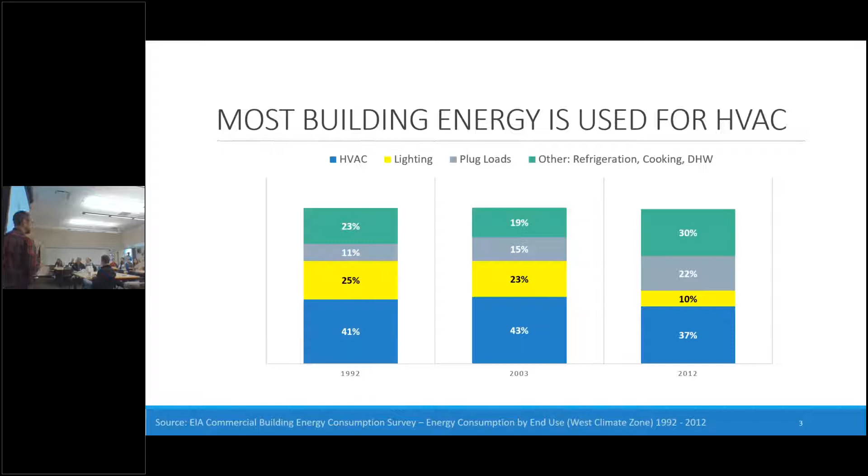And achieving comfort takes a lot of energy. Over the last 30 years, this is a breakdown of how buildings have used energy. The most recent data from 2018 should be coming out in the next year or two, so this is the most recent that we have available. You can see the bottom blue chunk is HVAC, and lighting has gone down a whole lot over the last 28 years or so. And it's not because we're living in caves, right? It's just that we're still getting the same number of lumens, same amount of illuminance, using better technology, using fewer watts to do so. And I think we need to do the same thing with thermal comfort.

If it gets below 70 degrees, you might say, oh, I like it on the chilly side. Sure, but your body actually goes through physiological changes in response to a colder environment. You get goosebumps, circulation changes. It starts moving more blood to your core, which means less blood going to your head. So maybe you start thinking a little bit more slowly, but especially your blood comes away from your fingertips, which, if a lot of us are typing, your typing speed will go down and you get more errors. You might also run to the coffee room and warm up your hands around a warm mug more often.

Same thing above 80 degrees, and this is just looking at air temperature. Your body goes into like venting mode, right? You start sweating. Your body tries to change its metabolic rate a little bit to adjust to your surroundings. So it might not be something that you actively notice, but there are actual changes that occur once you get outside of this comfort range.

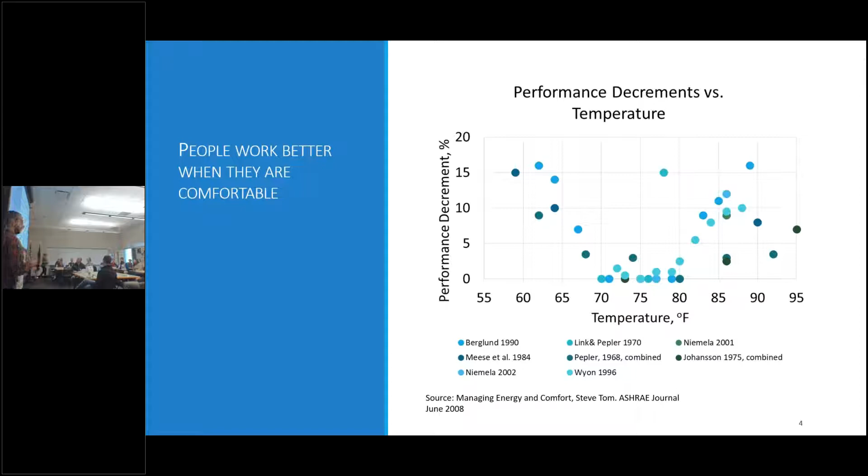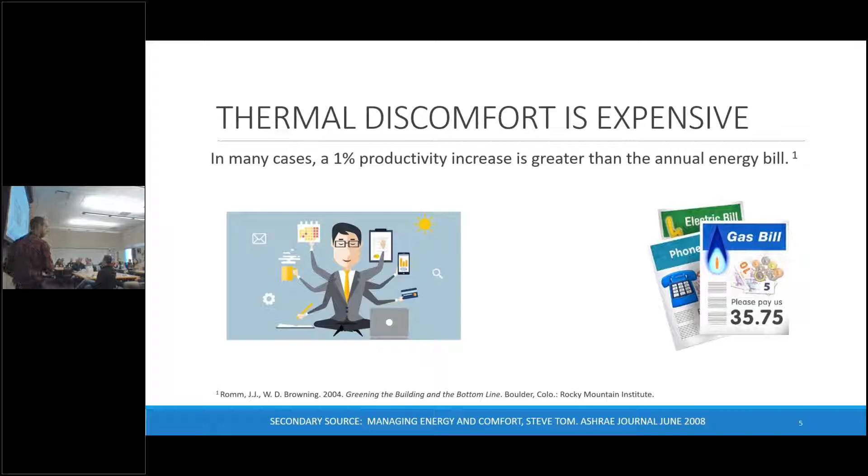But just to really hammer this point home, we're designing buildings for people, and I'm all about energy efficiency, right? That's kind of my world and how we look at payback periods in terms of energy efficiency options. But the utility bills in a building are often minuscule in comparison to the dollars spent for people's salaries. And this might be pretty obvious, but over the life cycle of a building, the vast majority of dollars spent per square foot are going towards people's work.

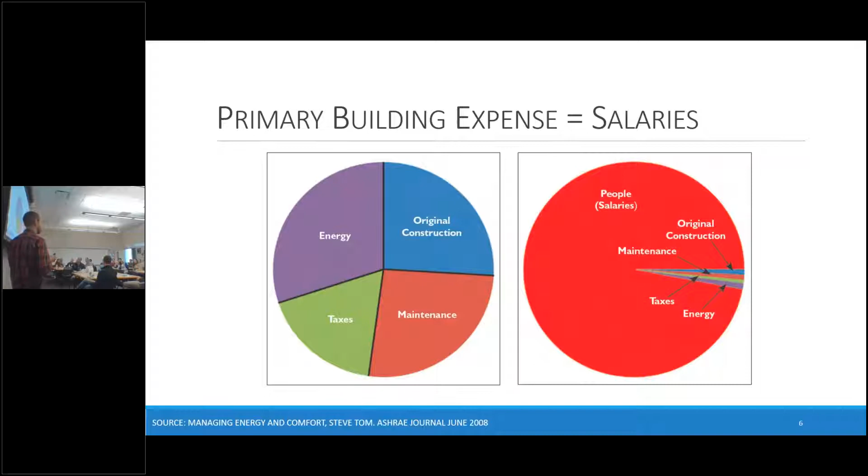In terms of real dollars, say you're building a new 20,000 square foot building in Boise that is going to house 100 employees. Assuming construction at $200 per square foot, that's going to be a $4 million building. I realize these are kind of Mickey Mouse ballpark numbers, but just giving you a sense that if everybody in there had an average salary of $50K a year, the dollars spent per square foot in that building.

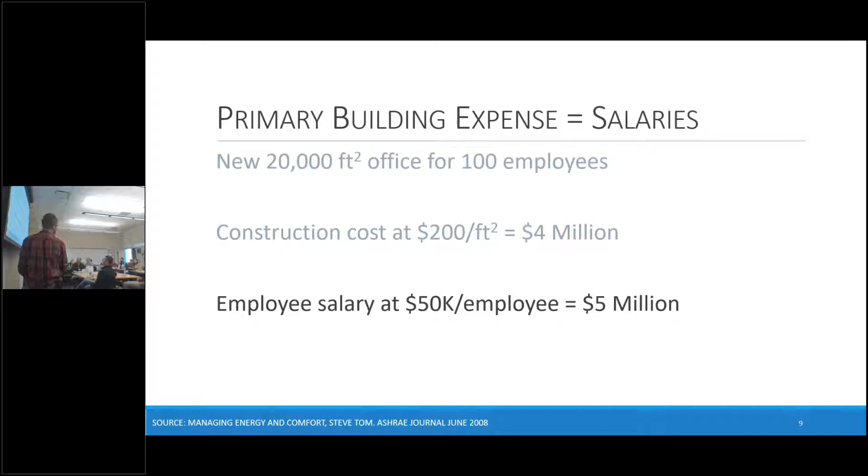The $5 million salary over the course of the year is going to outweigh the construction cost, and that's just in the first year. So if you are freezing or sweating in your office all the time, you're outside of that ASHRAE defined thermal comfort zone, that's going to cost each person $330 per year in terms of lost productivity. And there have been a number of studies out there about that.

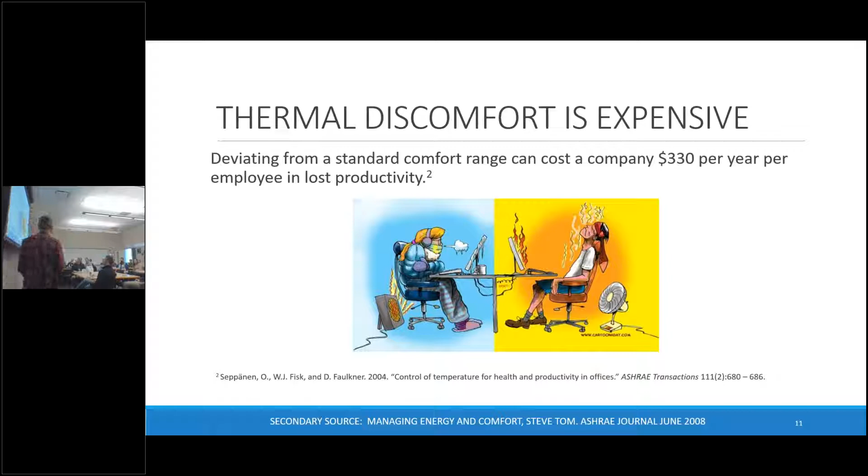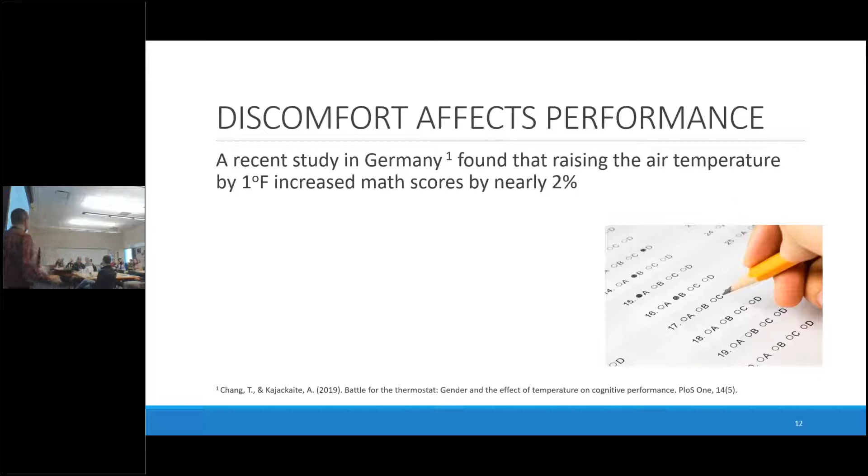A groundbreaking one that came out this year from Germany was actually on students taking math tests. They found that raising the air temperature a little bit, because they had been overcooling some of the classrooms, netted a 2% increase in math scores. This was particularly skewed towards the female students, which had different clothing levels and metabolic rates than the male students. This got picked up by the media, everybody, everyone from Fox to New York Times, saying engineers were freezing women out of offices, we're doing terrible things.

Once again, I think that's a misreading of the actual data and how buildings should be operated, right? There's a whole lot more that goes into it than just air temperature and design days.

So what actually is a holistic measurement for comfort? Because if you look in ASHRAE, they're not going to say put your thermostat at 72 degrees. They're going to say look to the thermal comfort standard.

There's a couple ways we can measure that. There's the predicted mean vote. If you were to just estimate how people are going to be behaving in a certain space, are they going to be generally on the cold side, -3, or way too hot, +3? You want to keep it somewhere in between, from slightly cool at -0.5 to slightly warm at 0.5. In between, it should be kind of out of sight, out of mind. They're doing fine. That is directly related to the predicted percentage dissatisfied.

Now, these are predictions, not actual responses. So what they did was they locked a whole bunch of people in a room and hooked them up to electrodes so they could actually sense when people started getting goosebumps, when they started sweating. It was the 70s, so it was fine. They could do that.

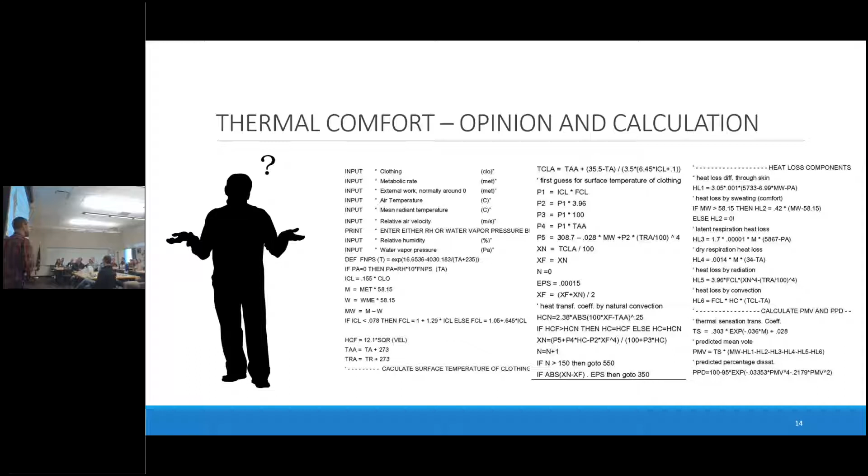And that's how we kind of came up with these equations to estimate that generally, if you're sitting outside in shorts and a t-shirt and it's 0 degrees, you're probably not going to be too happy, right? Your body's going to go through different changes, and you're probably not going to be super thermally satisfied or comfortable. All right, so those are our metrics, and there are 6 factors at play in terms of that.

So first, if you're just sitting, enjoying a box of chocolates, or soon to be lunch, that is 1 MET. That's what ASHRAE defines as their metabolic units. And then if you're, say, going for a run across the country, that's anywhere from 4 to 8 METs. The ASHRAE standard is mostly focused on people sitting in offices. So if you're doing anything more than kind of walking around, it's not necessarily going to cover that.

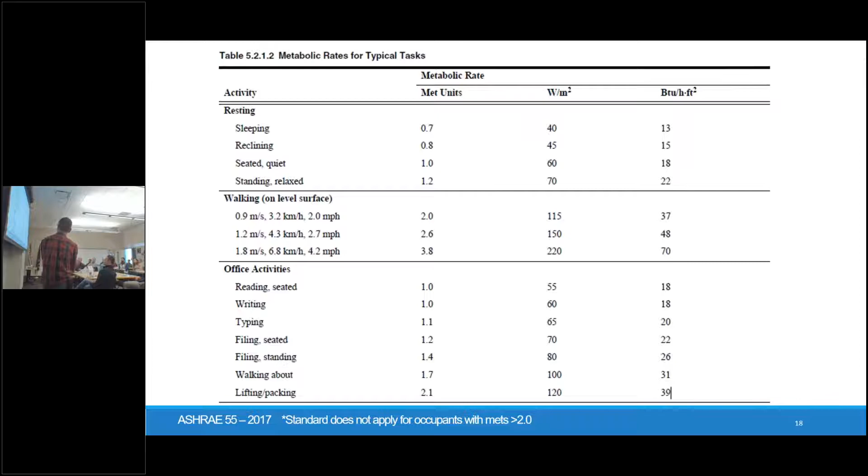So there's a table in there, and you can see an associated MET. Reading, typing, and even walking around, that's between 1 to 1.7. So that's one thing that affects comfort. The other thing is clothing level.

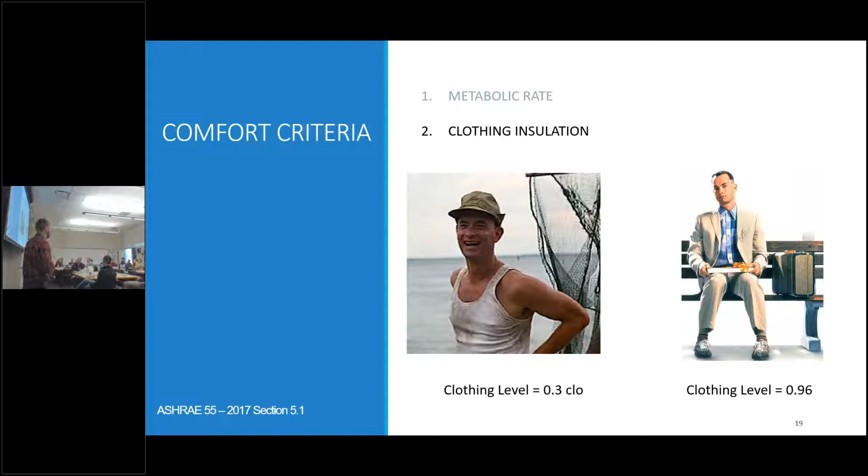So if you're out on a shrimp boat and you're wearing just shorts and a t-shirt, your clothing level is at 0.3. If you are wearing full trousers and a jacket, that is a clothing level of 0.96 or close to 1. And you can build your own clothing outfits if you want.

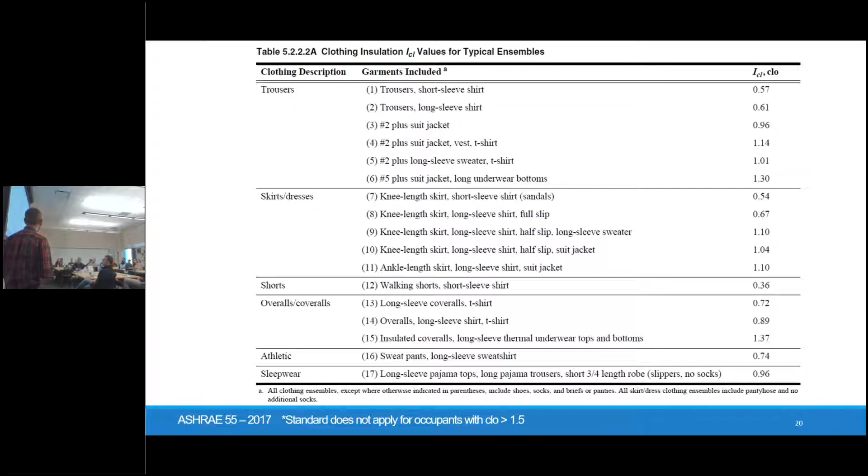And there's also a table of just kind of standard wear that you might expect people to have. Once again, if you are super bundled up, if you're coming into the office wearing a parka, they didn't do a whole lot of tests on that. So that's kind of outside the boundaries of this particular thing. So you can only tell somebody to put on so many sweaters. And after a certain point, after 2 or 3, it just doesn't apply anymore.

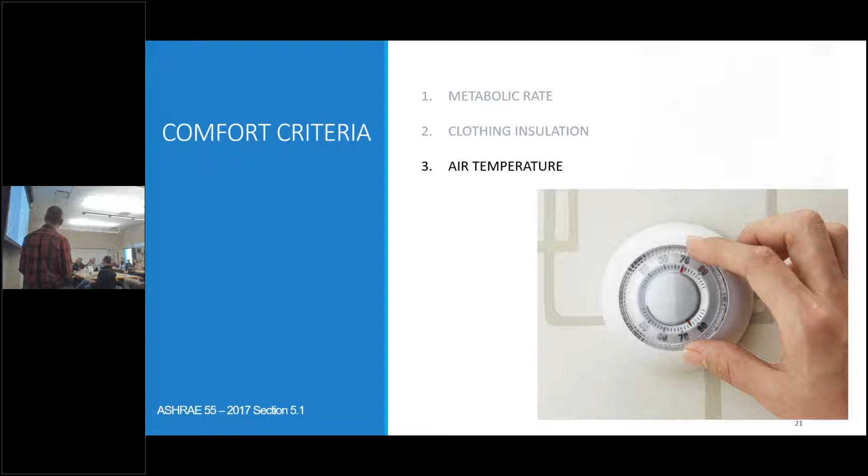All right, the third criteria is air temperature, and this is what we're kind of more familiar with. One thing that gets missed and has been a focus of mine is radiant temperature, or the average of the surrounding surface temperatures.

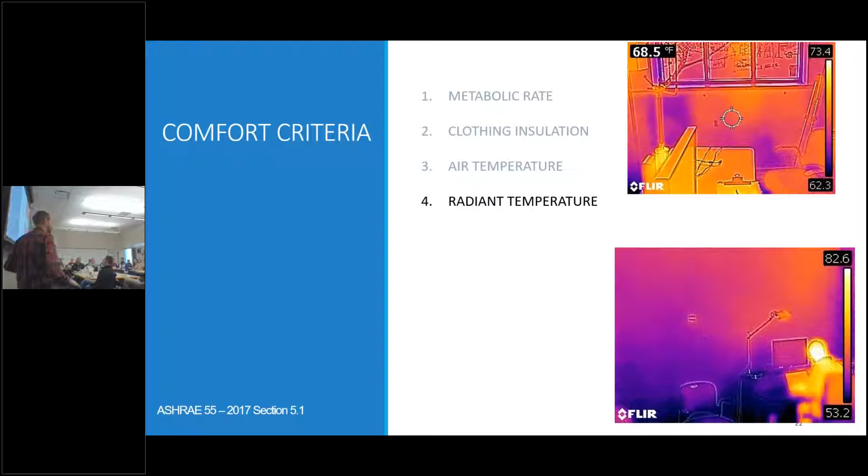So if you parked in the sun outside and you get back in this afternoon, sure, the air temperature might be a little bit chilly, but the surfaces within that car are going to be warm, and you're probably going to feel pretty comfortable on the drive back to the office. But there's a lot that actually goes into calculating what that average surface temperature is.

You could hang a black ball in the middle that's got a vacuum and a thermocouple in it, and it will sense all the radiation coming from all sides, and you could get the mean radiant temperature that way. But we don't like to have giant floating orbs in the middle of our office spaces, so you have to estimate it.

And P.O. Fanger was kind of the first to pioneer this in his dissertation in the 70s. So you're approximating a human either sitting or standing, and their distance and relation to different walls, and then adding up each of the surface temperatures on each wall. If there's a window, that's going to have a big impact, so you have to divide all of that. It's very complex, but a very robust way of actually averaging all the surface temperatures.

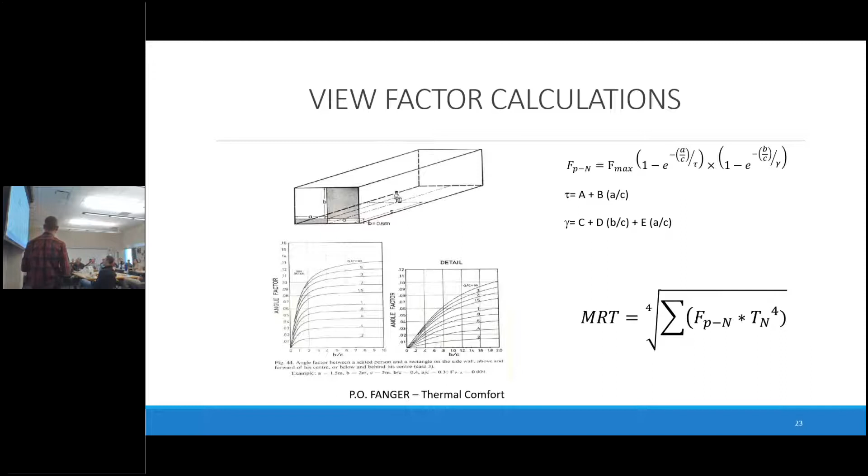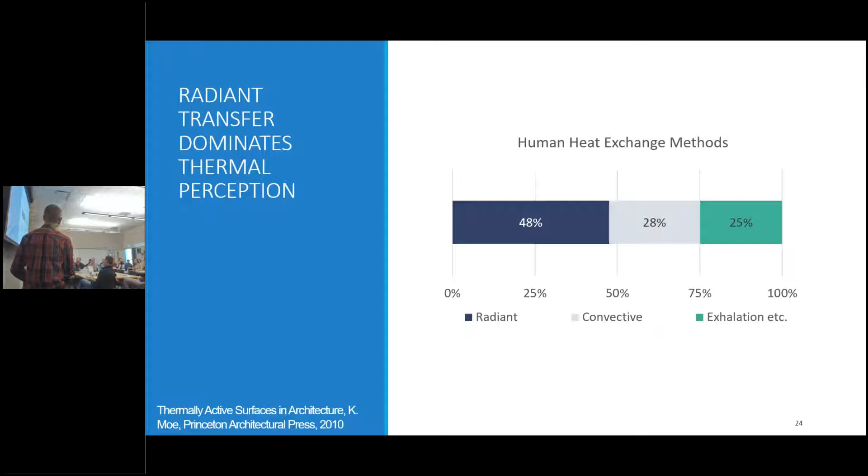And as I mentioned, this is kind of one of the dominant ways that our bodies are wired to perceive comfort within a space. The surrounding surface temperatures, our radiant perception, is the biggest piece of it, versus convective or our kind of metabolic rates.

Airspeed also plays a key role. If you are standing right above a floor vent, that's going to feel very different than if you're in kind of a dead zone. ASHRAE 55 assumes an airspeed rate of 40 feet per minute or less. If you get beyond that, then you have to kind of do some adjustments to your operative temperature.

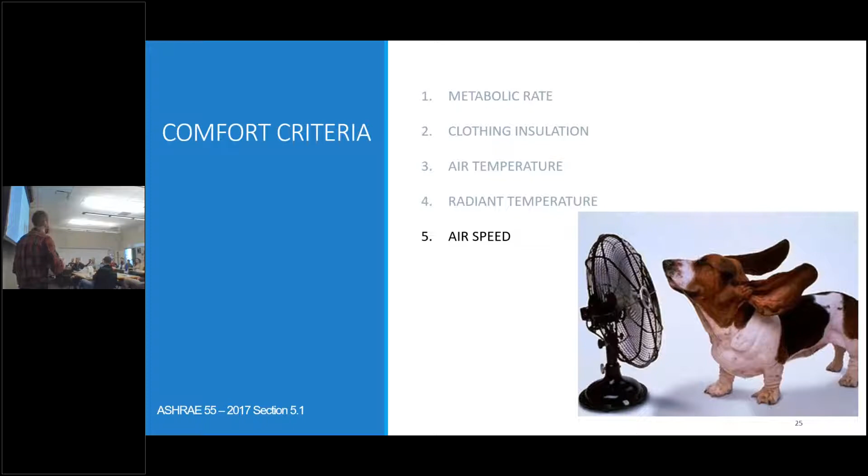And last but not least, humidity. We also sense the latent energy in the air. So those are the 6 factors. How do we apply them?

There is step 1, we can use the graphic zone method. This is basically an advanced psychrometric chart that you're probably familiar with, but it's only suitable for a very narrow set of conditions. It's looking at people that are basically sitting at their desks, maybe typing.

Clothing level of between 0.5 to 1.0, and it takes a lot of clothes to actually reach 1.0, and that's where a lot of the gender discrimination came from, or complaints of that, because a clothing level of 1.0 assumes you're basically wearing like a 3-piece suit.

It also does not account for direct sunlight, and it's limited in terms of its humidity ratios. But it's better than nothing. It's better than just assuming a certain set point of the thermostat.

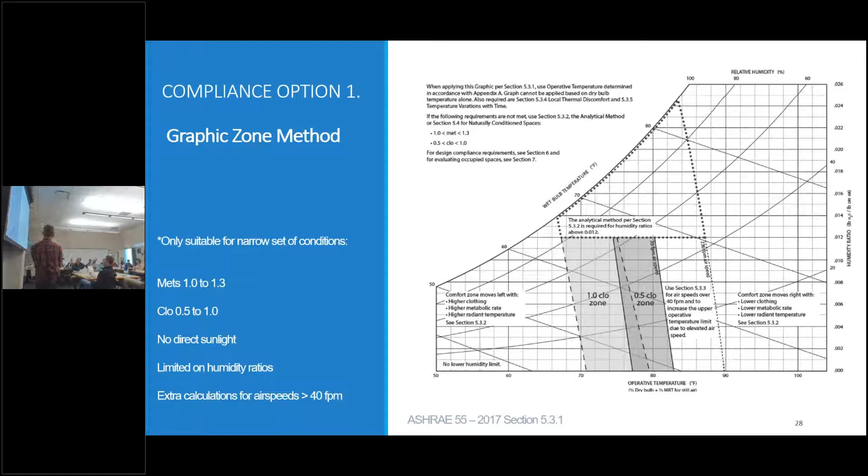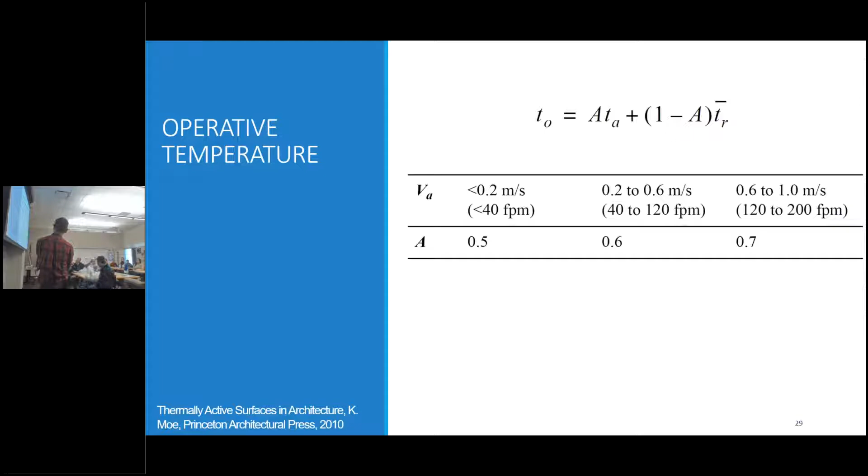All right, and in terms of the temperature that you're reading on this, you're looking at the operative temperature, which is an average of the surrounding surface temperatures and the air temperature. That changes a little bit. It can be weighted a little bit more heavily towards the air temperature depending on the velocity, but for most situations, you can use kind of a rule of thumb and just average the two.

The second compliance option for meeting ASHRAE 55 is to use the analytical method. They have all the code for this in the book. You can program it in BASIC or Excel if you want. So I've got my own Excel sheet that does all this for me.

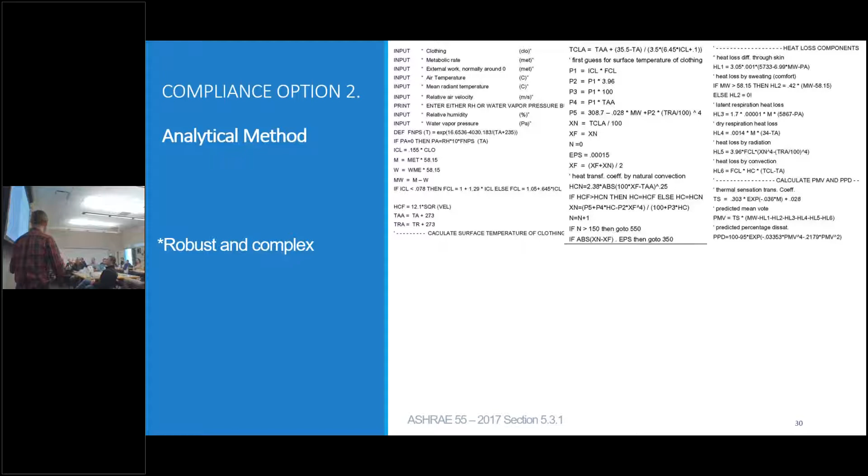It is very robust. It takes into account all of the 6 criteria. And what it essentially does is it calculates the temperature that is on the surface of your clothes. So it will look at the convective coefficient coming off of each individual person.

So that's kind of the criteria that we designed for. And we want to make sure that when we're sizing systems, instead of just sizing for, say, 70 degrees Fahrenheit, we try to maintain a predicted mean vote between -0.5 and +0.5. There's a lot of complex steps going through that, right?

So energy models are one way which has that code built into it. I'm a fan of Energy Plus and Open Studio since they're free, Department of Energy resources available to you.

ASHRAE, though, has also sponsored a couple of online tools that you can use through the Lawrence Berkeley National Lab. So here's one to actually calculate mean radiant temperature. It's available off of GitHub, but if you just Google MRT calculator Berkeley, you can design any room, where your windows are, what your orientation is, and hover your cursor over any square within it, and it will actually calculate what that mean radiant temperature is for that one point.

So this is looking specifically at your design day, like your July 21st in Boise, hottest summer day. Am I still going to meet this criteria or not? And I think it's important to use this tool for sizing as opposed to just looking at an air temperature, because you might end up sizing your system smaller. You might be oversizing if you're just looking at the air side system only.

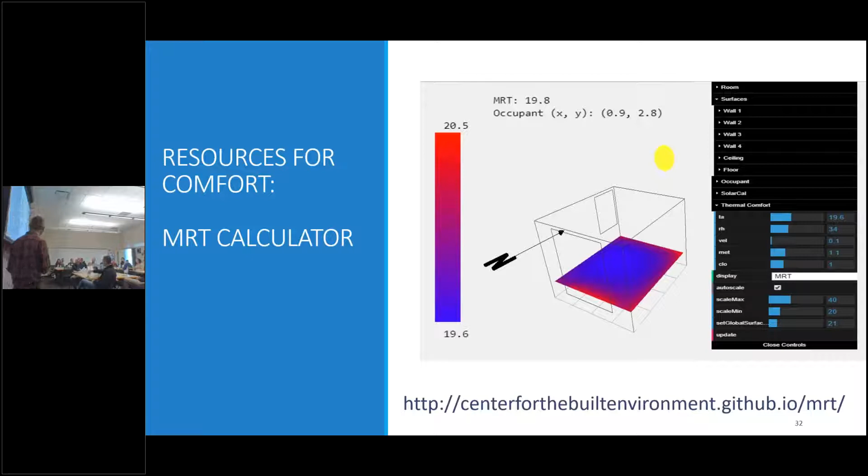The other tool that I use a lot is the comfort tool. That's also just available at CBE Berkeley. And this has your 6 inputs.

So if you are given a certain situation or somebody says, I'm unhappy in this environment, you can actually take measurements, put them all in here. And then what you see in this purple band is a range, because we all have different sizes, shapes, preferences. But generally, this is where most people are going to feel comfortable.

The lower limit here is a PMV of -0.5. Upper limit here is a predicted mean vote of 0.5. And then this red dot is where you actually are. So if you're within this band, you can use this tool to say, I've met compliance with ASHRAE 55. If you're outside of that bound, then you can't necessarily claim that.

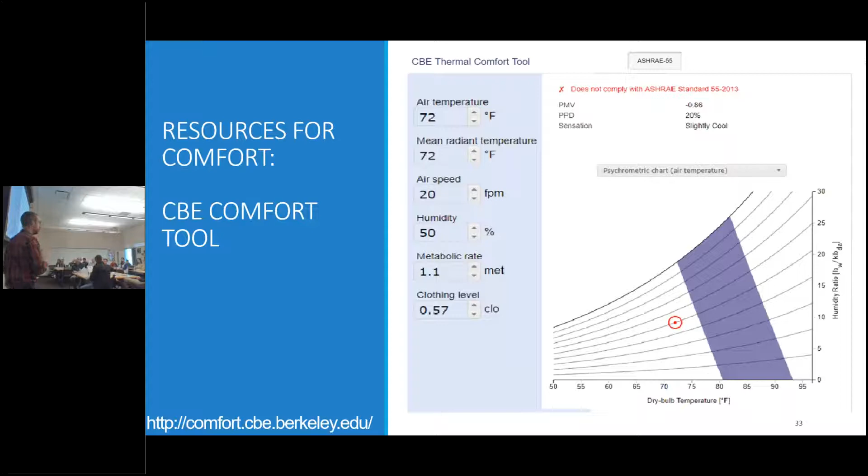So we can actually go through and take measurements and incorporate all 6 criteria instead of just looking at a thermostat. So I use a little thermal camera. They've come down a lot in terms of size and price. You can also check these out from our tool loan library, which is free.

That's another Idaho Power resource. So we've got more tools upstairs. This can plug into your phone as well. And I think it's like $250 now. We even have a smaller one that's about the size of a pencil eraser that we're doing for some research right now, and that one's really fun to work with too.

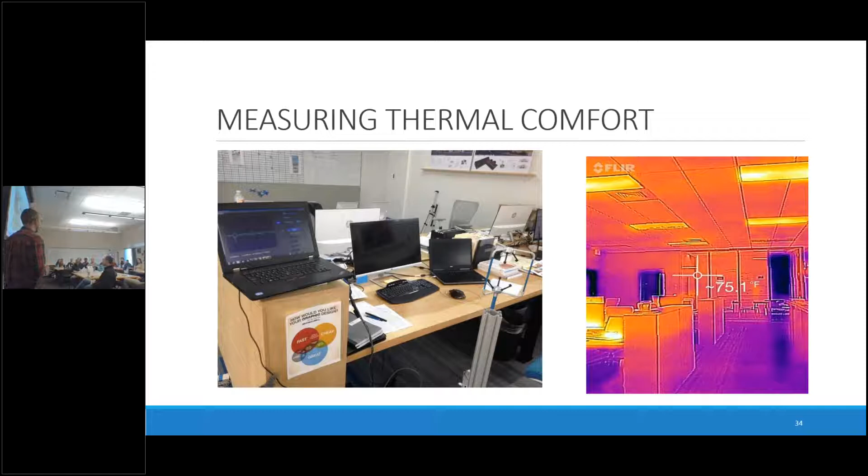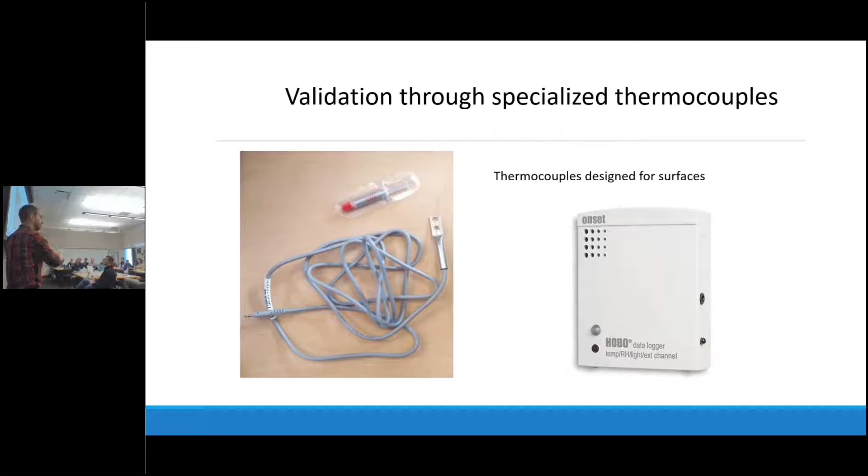So that one, you get a sense of surface temperatures. Of course, you can measure air temperature and humidity. You can log those temperatures as well using thermocouples. You apply some thermal paste to one side, put some insulation tape over it, so that way you're not picking up the convective air temperature, you're actually getting the surface temperature of the wall. And you want to make sure that you cover each surface - each wall, the floor, the ceiling, a window, if there is one in there.

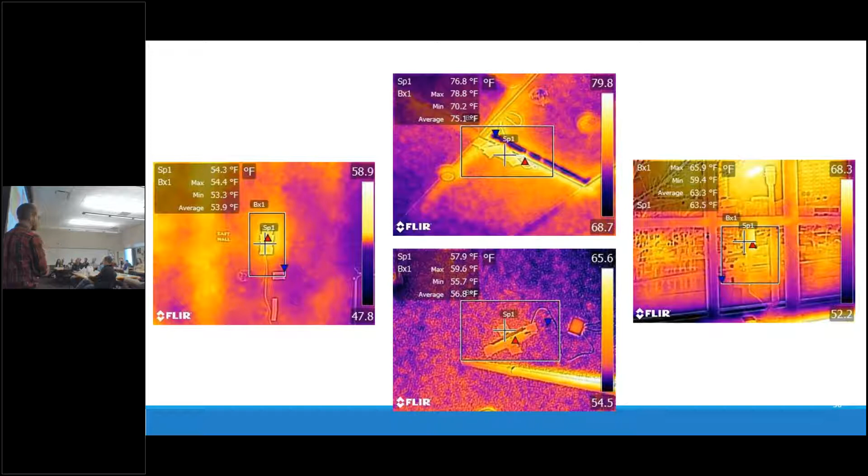And then you can plug that into your calculation method or your Berkeley MRT calculator and figure out what the mean radiant temperature is over time. So we actually went around and did that. We also measured airspeed - I've got a sonic anemometer here, which picks up air velocity within this space, can sense very slow air currents, which is great.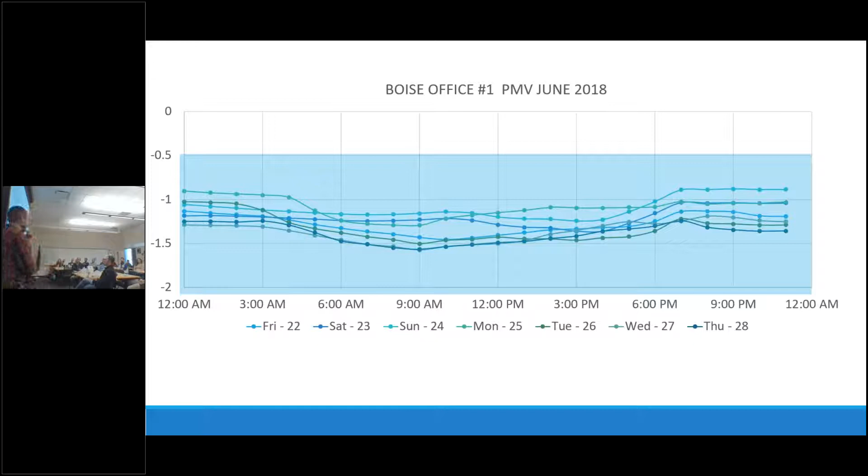And when we carted this around and stuck thermocouples everywhere in people's offices, they were very nice to let us do that. We found generally chilly offices within the Treasure Valley. So trying to keep this anonymous, this was an office not particularly far away from here.

And you can see on the vertical axis is our predicted mean vote. So we want to be above -0.5 in every situation - we've got a few days layered on each other here. You can see the setback is here, and it was actually cooling more, keeping people more uncomfortable during the day.

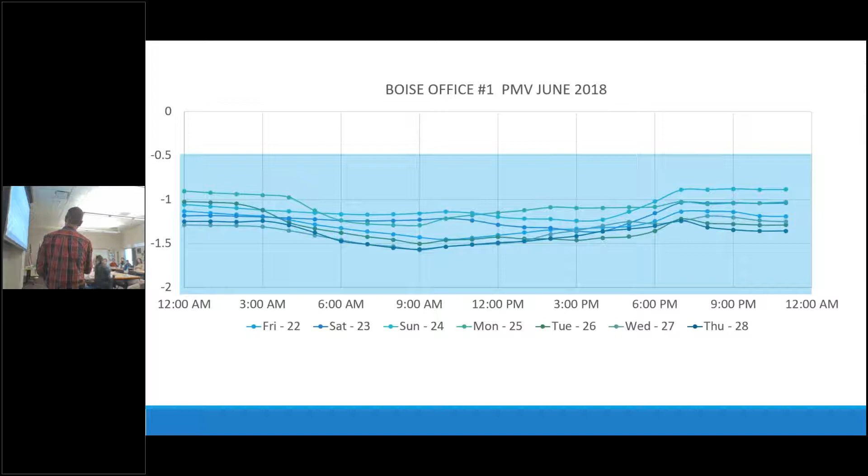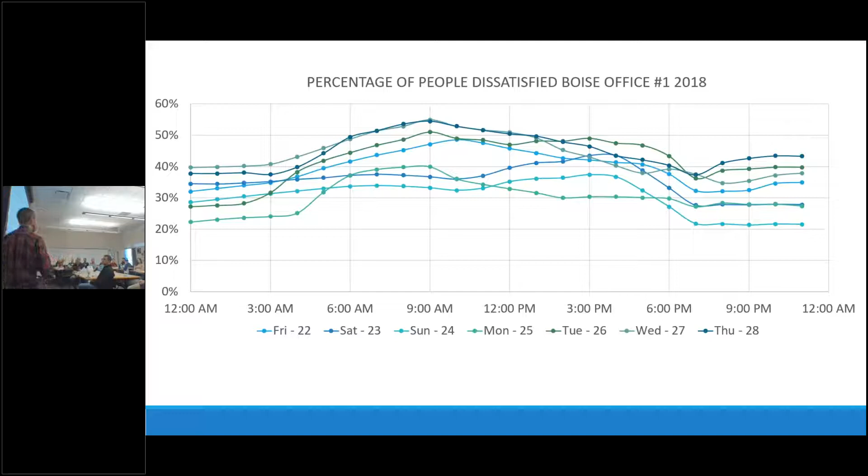You're always going to have 5 people that are unhappy no matter what - that is the minimum percentage of people dissatisfied that you can actually have. If you have a room full of 100 people, there's always going to be 5 that just don't like whatever that situation is. But you want to keep it less than 20%. That's associated with the PMV of 0.5 or less. Once you get more than 1 out of 5 people that are really unhappy in that space, that's when ASHRAE says, all right, you're no longer meeting comfort criteria. You need to change that.

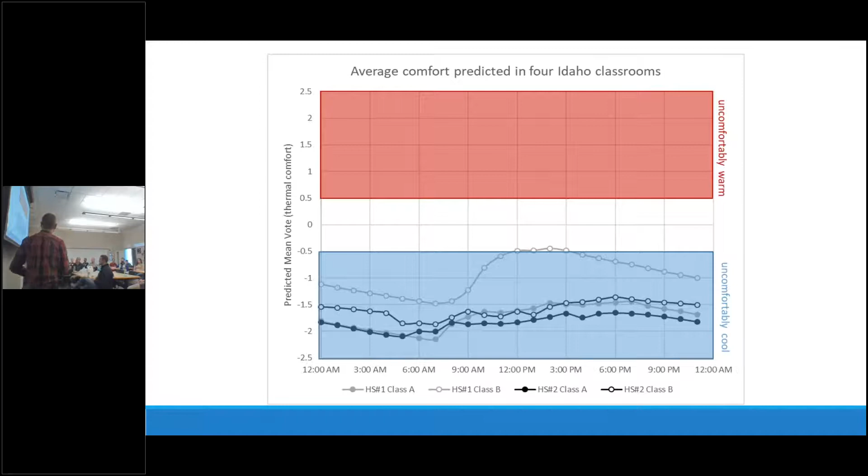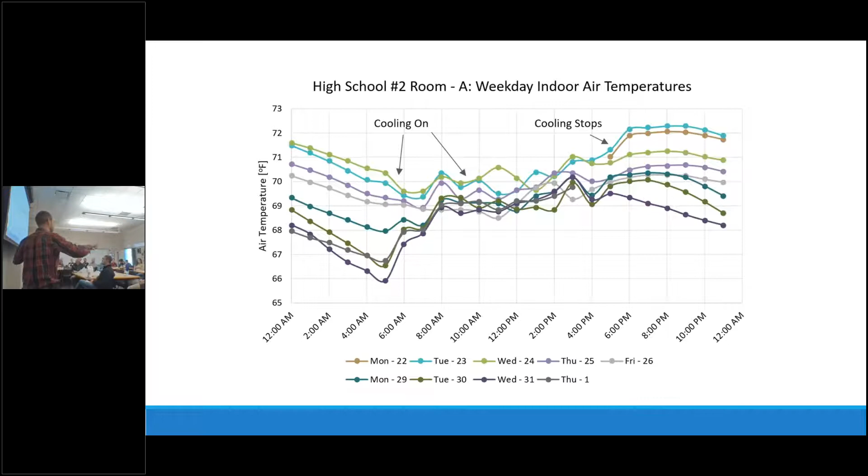We can do better than that as engineers when setting up controls. One thing to do would be to have our setbacks a little bit higher and have warmer surface temperatures in the morning, then do more conditioning later on as the surface temperatures start to warm up, instead of just having a fixed set point all throughout the day.

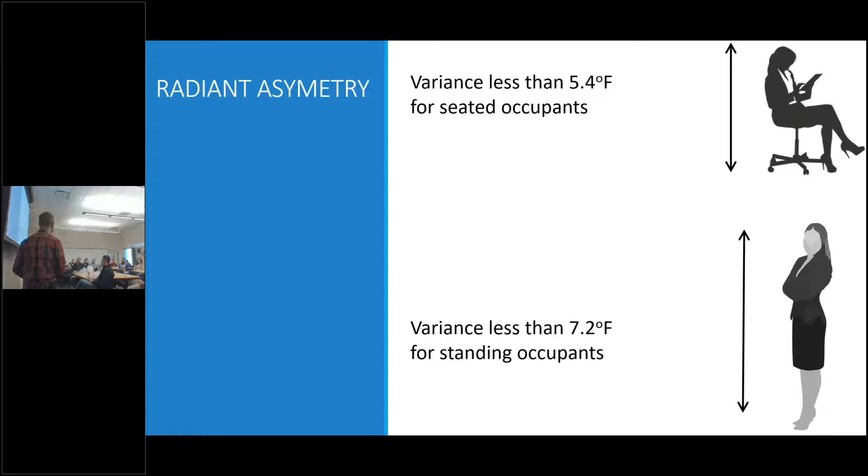There are a few other special considerations within ASHRAE 55. One is to make sure your feet aren't an icebox and your head's not a furnace, minimizing the vertical stratification of temperature. You can get up to 5 degrees of stratification while sitting down and still be in compliance, but if it's more than 7 degrees while standing up, you're out of compliance.

Solar radiation - my puppy knows this instinctively. We all know this: if the sun is shining on you, that makes a big difference on how comfortable you are. It wasn't until 2017 that ASHRAE actually started incorporating solar radiation into their comfort standards. So now we have it, which is great, but now we also have to account for it.

There are two ways to go about it. One is a very complex analytical approach where you calculate your mean radiant temperature, looking at the surrounding surface temperatures, referred to as long wave radiation - low temperatures, say 70 degrees, emitting long wave radiation. Then you also have to figure out your short wave mean radiant temperature, which is how much radiation you're getting from the sun itself.

There's a lot that goes into it. It depends on how much of your body is exposed to the sun, where the sun is in the sky, and your angle of view to it. Once you calculate both of those, you add the two of them together.

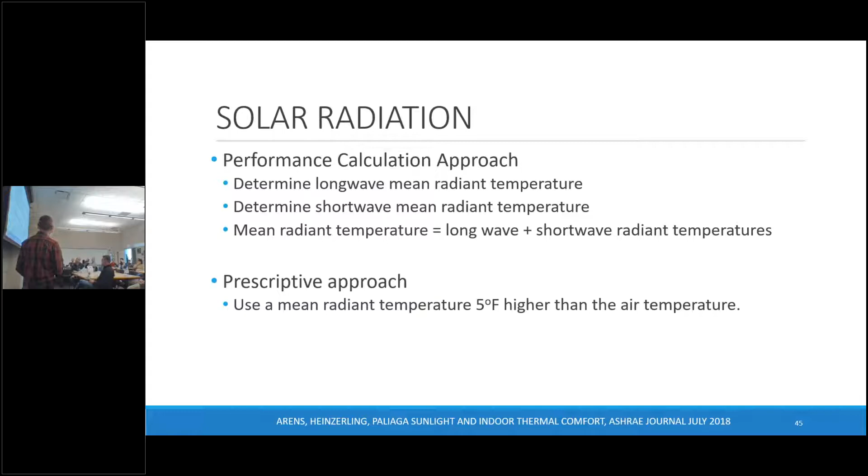A much simpler approach, and one that most of us will probably be taking, is the prescriptive approach, where you basically add 5 degrees to your air temperature, or assume that your mean radiant temperature is 5 degrees higher than your air temperature.

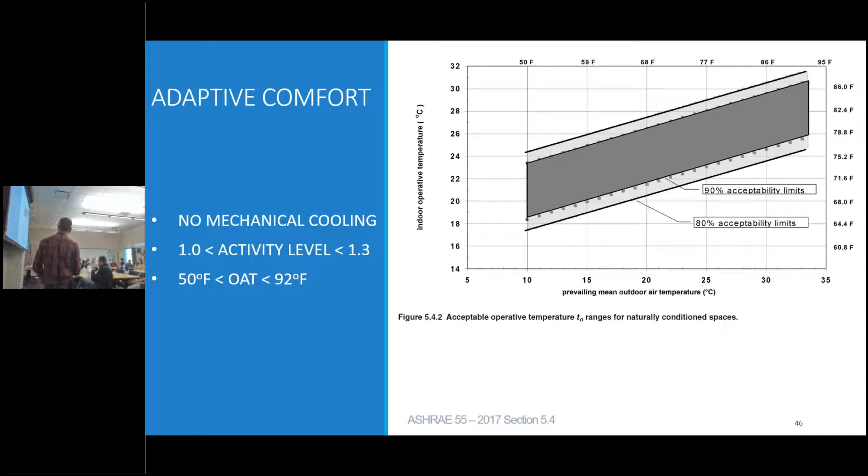Another consideration is if you're in an environment that doesn't get particularly hot and you have no conditioning equipment in it - if you have no air conditioning equipment, there is adaptive comfort, where you're looking along the top axis of the prevailing mean outdoor air temperature. As long as your indoor air temperature falls within this range, you can meet certain acceptability limits, and ASHRAE gives you a pass if you're not in heating mode.

But it's very limited to your activity level and what the outdoor air temperatures are. Once again, you can't be using heating at the time you're taking these measurements, and it does not apply to a building that has cooling as an option but isn't using it. It's just for a building that has no cooling equipment installed as a design feature.

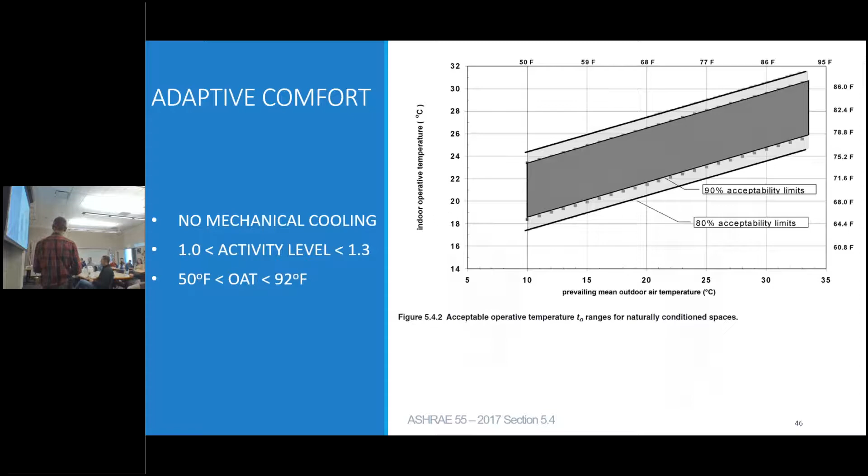Now, this is not necessarily part of ASHRAE 55, but it's something I've come across in the midst of my research: thermostat height has a really big impact on how the system is actually learning whether it should kick on or turn off.

There are certain ADA recommendations to not put it above 48 inches. If you walk around this building, at least in my office, I think they're still installed at 60 inches, and that makes a big difference.

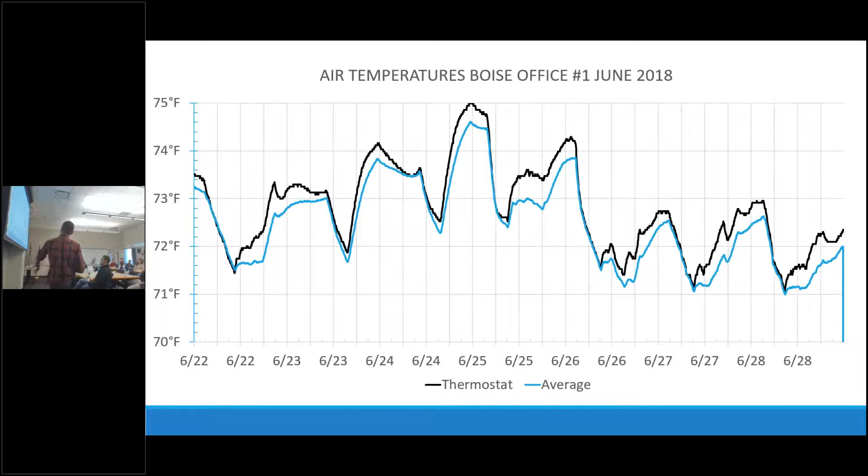This was a number of offices that we measured where we had a little thermocouple installed right next to the thermostat, and then we had a thermocouple installed in somebody's vacant office, looking at the average of the air temperatures we're collecting at the center point in the room. There could be a few things at play here.

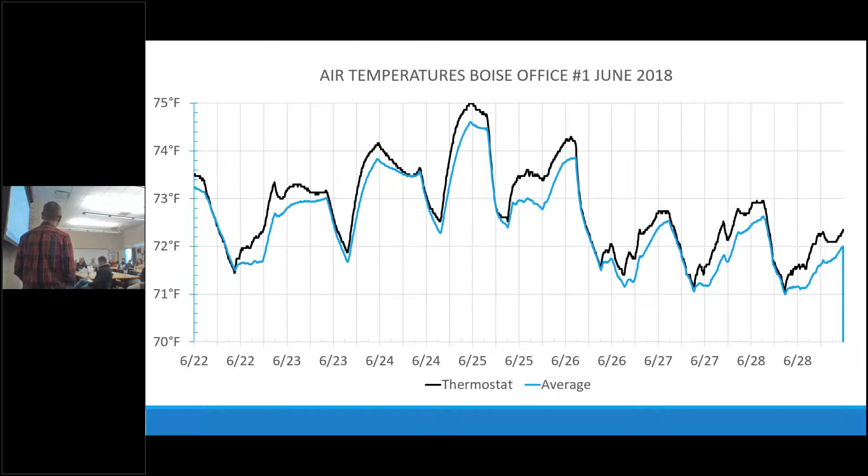Thermostats don't draw a whole lot of power, but they do draw some power, so there might be some heat being radiated out and increasing the temperature around that. It might also have to do with how high it's mounted, but in every single situation, we found a 1 to 2 degree Fahrenheit difference between where the thermostat was measuring, shown in black, and the rest of the air temperatures we were measuring within the space.

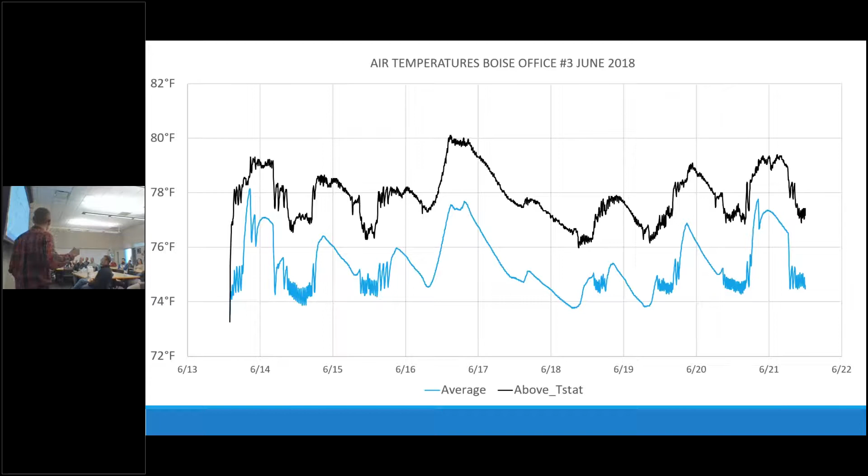This can have a really big impact on people when they might say, oh, I'm chilly in this place, and then the facility manager comes through and says, well, look, it says 72 degrees, you should be happy. Just because the thermostat says 72 doesn't necessarily mean that is the air temperature you are experiencing, especially if you're seated lower and have a different center of mass.

Another thing, and I have to give credit here to Dr. John Gardner at Boise State who pointed this out, is people will complain about drafts. It's true you can have some degradation around windows - caulking around window seals degrades over time, and you might get some air infiltration. But even in new buildings, people complain about drafts next to cold windows even if properly sealed, because you get convective currents. The air sticks against the window, falls down, and runs across the desk. So people experience a very real airflow even though there's no air exchange between indoors and outdoors - it's a cold surface causing convective currents.

For me, this is a good reason to have more insulated envelopes, so you can figure out what that indoor surface temperature is going to be. Going back to Lawrence Berkeley National Lab, they've done a lot of research on this and have a free tool called Therm. They also have a database of windows called Window 7.7. They're a bit complex, but you can get simple models running pretty quickly, which is great.

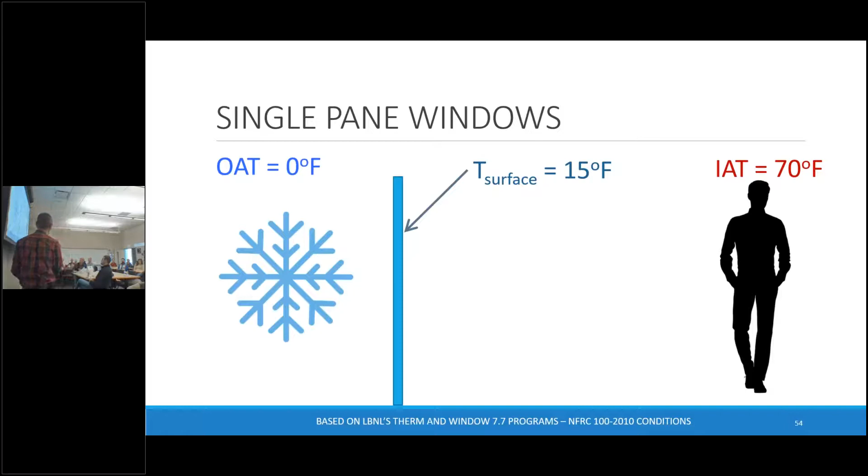The National Fenestration Rating Council, NFRC, the window standards people, have certain criteria for measuring indoor versus outdoor conditions to calculate heat transfer. Their system uses an outdoor air temperature of 0 degrees and an indoor air temperature of 70 degrees. If you look at a single pane of clear glass, that indoor surface temperature is 15 degrees - a big difference from 70 degrees, and that's going to drive a whole lot of convection.

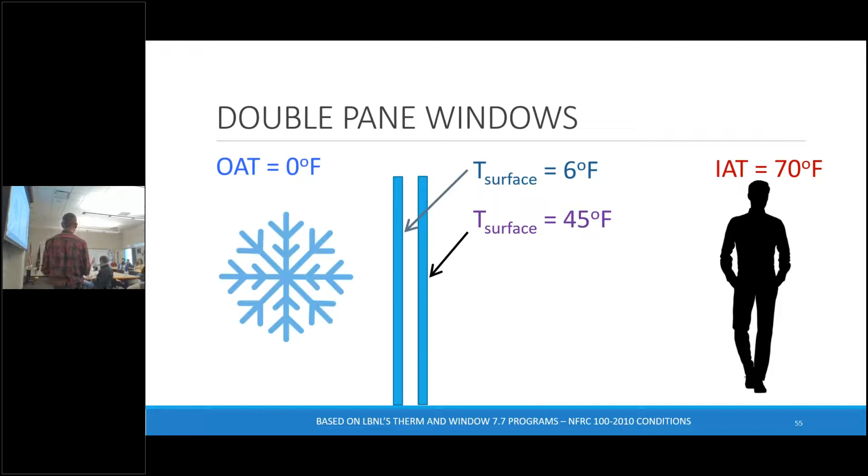If you add a secondary pane - assuming clear 3mm glass with argon in between - the inner surface temperature is 45 degrees. Much nicer, but still a pretty big delta T from the rest of the indoor surface temperature. If you look at a triple pane window, now required for many passive homes or buildings trying to meet the Living Building Challenge, that indoor surface temperature is 62 degrees. So it's going to be much more comfortable sitting next to that window, not only from a mean radiant temperature standpoint, but also from a convective standpoint, because you've got lower air velocity.

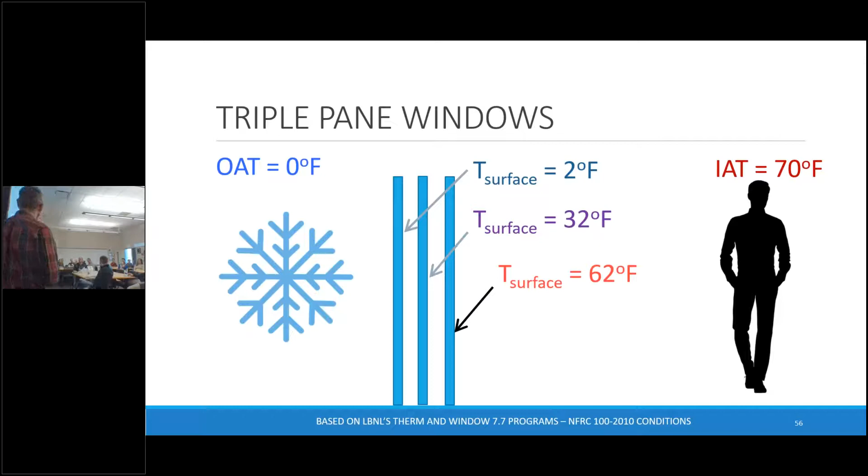And LEED is pushing this as well. In LEED version 4, you have an optional point for complying with ASHRAE 55. There are two ways to meet the standard. First is to meet ASHRAE standard 55, still at 2010, so you don't have to worry about solar radiation calculations yet - you're good there. Or you can look at the international standards. Basically you're looking at your design days, and instead of conditioning to a particular set point, you're conditioning according to this more holistic comfort level.

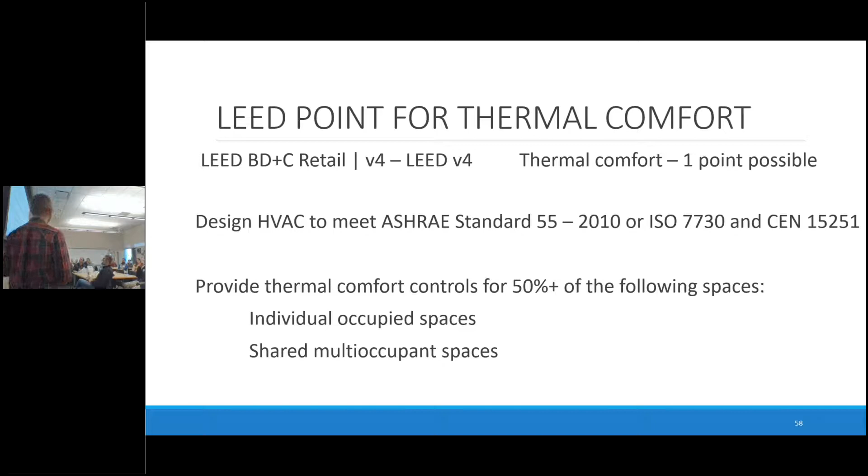So that's part 1. Part 2 is to give people the chance to do something about it. Not only are you saying we sized the system correctly, but let's give people some control. You have to provide occupants - not just building managers, but occupants - the ability to control 50% or more of all individual offices, as well as 50% or more of all shared occupancy spaces, like cubicle farms and open office areas. If you provide controls to 50% or more of those spaces and sized your system based on ASHRAE 55, you're good to go and you get this extra LEED point.

So ideal controls - there's a couple parts to it. One is we size our systems based on this more holistic standard. Second is we try and control more towards that. So even if you don't have radiant floors or thermochromatic windows, at least take those into consideration. Take some of the surface temperatures into account for your controls, and manage humidity, especially if you're using a dedicated outdoor air system, so you don't get condensation on some of those cold surfaces.

And if possible, anticipate loads. If you're doing a night flush in your building, you know the surface temperatures in the morning are going to be a lot cooler. That's great because now you can bring in warmer air temperatures for the early part of the day, then do a little bit of conditioning in the late afternoon. At 6 or 7, people are going to leave, and you can run it back to your set point and do your night flush cycle again. So just anticipate some of that in your control sequences if possible, and use energy models to back that up if you're advocating for it with a client.

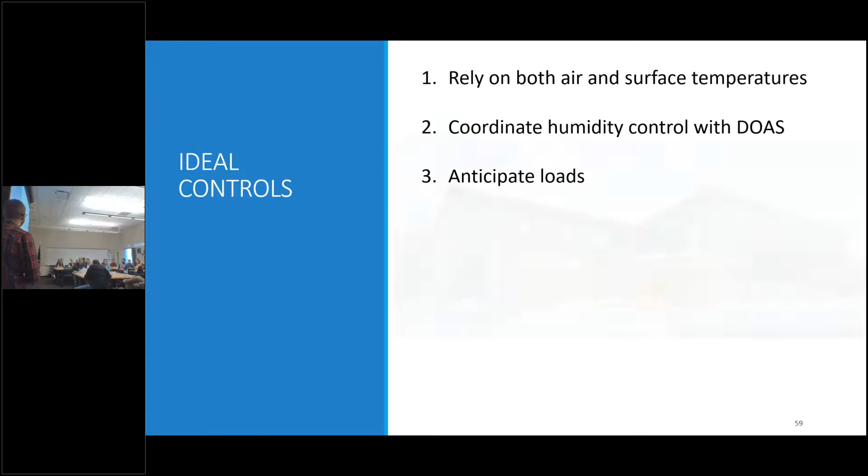I'm a big fanboy of Amory Lovins and his Rocky Mountain Institute. They just built their headquarters a few years ago. You can watch a YouTube video of all the things that went into this building.

It met every standard out there. It met the Living Building Challenge, so it's producing more energy than it consumes. It's LEED Platinum, and it's also built to Passive House standards - a hyper insulated building with triple pane windows. I think it's R50 or 60 walls, and even more insulation on the roof.

What they provide are chairs with vented backs, similar to what you're sitting on now, but vented seats as well, so that it's cooler during the summer. They have no cooling equipment installed whatsoever, but they provide each person with an individual fan.

They also have electric resistant radiant mats underneath everybody's desk that they can turn on or off, as well as embedded into the ceiling - I know they've got a fan above each desk, so I'm not sure about the ceiling part, but at least the walls as well. So you get those nice warm temperatures we associate with comfort and coziness all throughout the winter. And since it's triple pane windows, you aren't getting those harsh sensations of being right next to the edge of a cold surface.

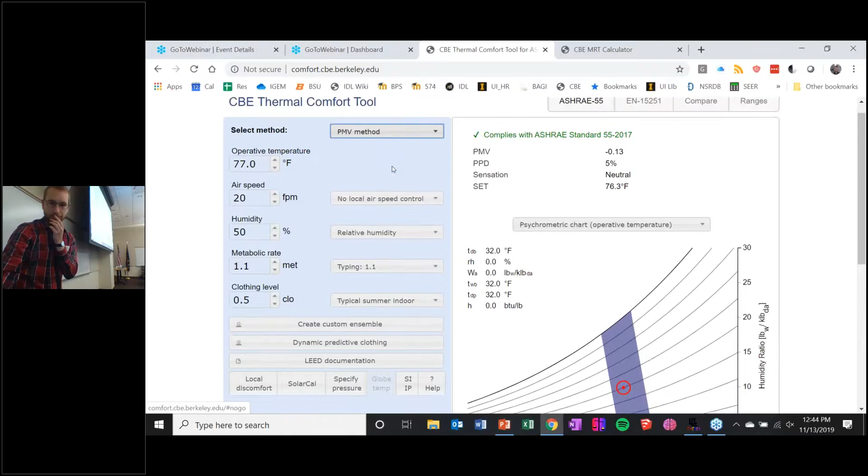I like to think of it as the sweater effect. So, PMV method, ASHRAE 55. Here we go. Operative temperature, let's change that down to about 72 - that's what we're looking at here. Airspeed, I'm going to leave that at default. Humidity, and then clothing level - you can create your own custom ensemble if you want.

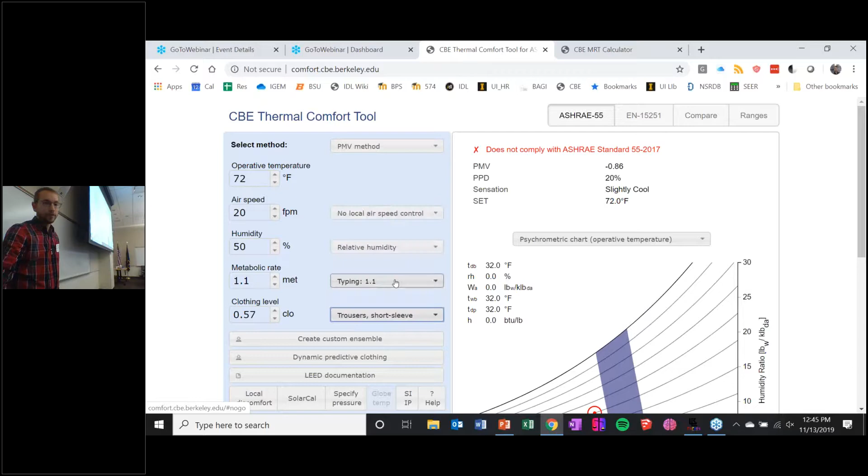Or if we were to look at, say, trousers, short sleeve shirt, socks, shoes, underwear - everything is accounted for in that. But if you were to then add a sweater to that - let's hope people are wearing underwear, t-shirts. It is overly specific - yes, you can get long underwear in there, slippers, shoes or sandals.

Let's see, I don't think we put pants on yet, so we should probably do that. Let's do trousers, and then we can start adding in some sweaters. It also goes into the type of chair that you're sitting on too.

Your beard might be lost on this, Wes. I'm sorry.

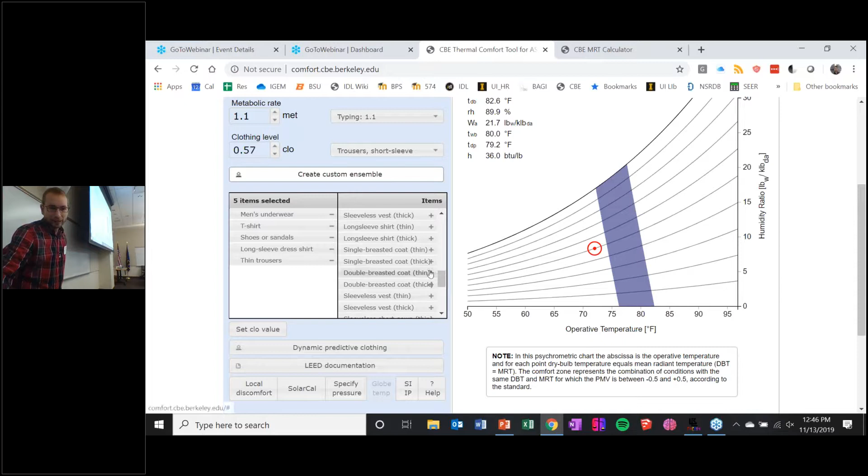But yeah, if you start adding that in, then we can set a new clothing value and kind of move that comfort band around. It's something that's really fun to play with. But it has limits, right - adding a sweater adds, I think it's like 0.2 or 0.3 to the actual outfit. So it's not like you're going from 0.3 to 1 or something like that.

Yeah, Tim. So it looks like you went around to some offices and found that things are cold. Seems like the traditional design temperature is 70 to 75. Do you recommend a change in air temperature?

For summer, I would definitely look at an air temperature closer to 74, even up to 76. It's going to feel different if you're standing or walking around. I think that's something we don't necessarily realize walking around the office - oh boy, this is way too hot. But if you're actually sitting and typing over time, you notice your hands are getting a little cold. That's really what this standard is focused on.

So yeah, because the surface temperatures were generally staying in the 70 to 72 range. And once you accounted for that, especially sitting next to a window in the morning, having an air temperature all the way up to 76, you are just within that comfort range.